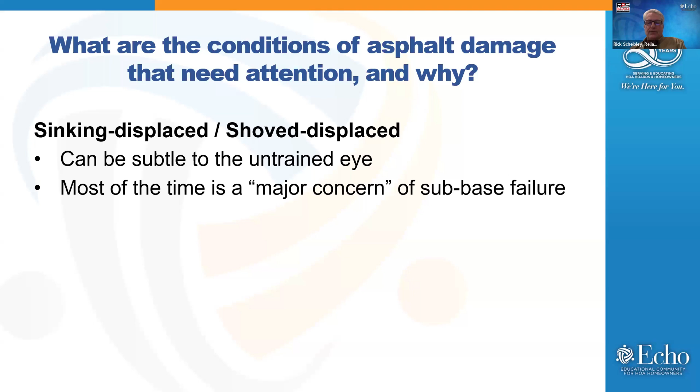This can be subtle because you could have an area 4-6 feet wide and sunken 1 to 1.5 inches, and to an untrained eye, you may not catch that. Secondly, most of the time, anything that's sinking or shoving displaced up or down is a major concern because it more than likely includes sub-base failure. Let's go to the next slide for pictures.

So the picture on the top left is an actual project in Northern California where our assessment noticed that the asphalt had sunken 1.5 to 2 inches below the top of the catch basin. So in the winter, 1.5 to 2 inches of puddling would occur, and that water would just sit on the surface, soak into the ground under the asphalt through the joint between the asphalt and the catch basin, and then eventually fill up high enough to go down the storm system.

So that was very subtle. Other than the immediate small trip hazard, it wasn't showing itself much on the surface, but it was sinking at the same time. So that was a sub-base problem.

On the right-hand side, it's very common. It's shoving. The 2 zeros that you see in the bottom right picture are areas where the asphalt was actually shoved higher by the depression in the middle between them. So it was a roadway that was not built for the level of traffic, the weight of traffic, the amount of traffic that was using the road. And as you can see, it's a fairly narrow road. So the travel point is exactly in the same spot for tires every day.

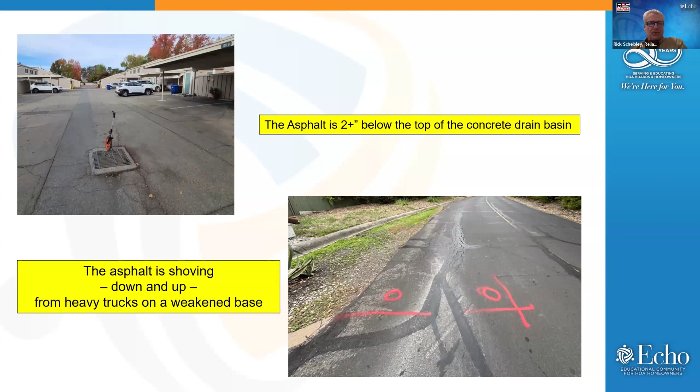So this rutting or shoving up and down is also a concern that the sub-base or the base that's under the road was not sufficiently built. It was not structurally built strong enough to hold the load of the road. So let's go to the next slide, look at another type.

Another condition is potholing. And of course, nobody wants potholes. And they are a warning to you that you have possibly waited too long to be able to efficiently maintain the pavement. And what I mean by that is the cost of fixing sub-base or base with the asphalt increases significantly what the square foot cost of your pavement maintenance project will be, unless the contractor that you hire doesn't address those things, which is very common.

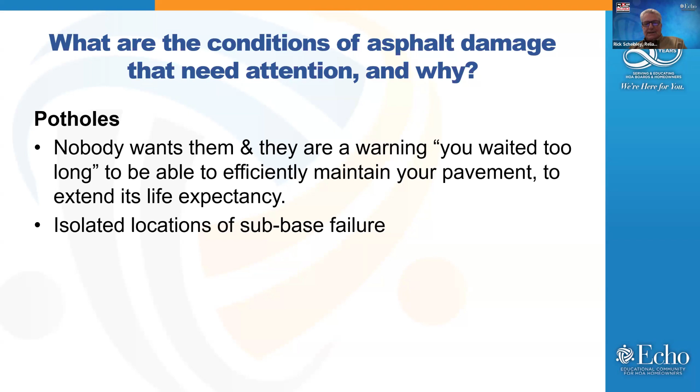But potholes, again, are an isolated location of sub-base failure. And next slide, we'll see a couple of examples. Here's an area where very obviously, very specific areas had collapsed and started sinking into the ground. What happens with asphalt is once it cracks and displaces, the rain starts increasing the amount of water that can penetrate the base. Once the base is soft with water, then it starts moving, and that allows water to penetrate the base and literally get into the subbase.

And at that point, the native soils in this road are not handling the amount of water. You can also see that this road has been neglected quite completely. So it's also a part of what's causing these potholes. Next slide, please.

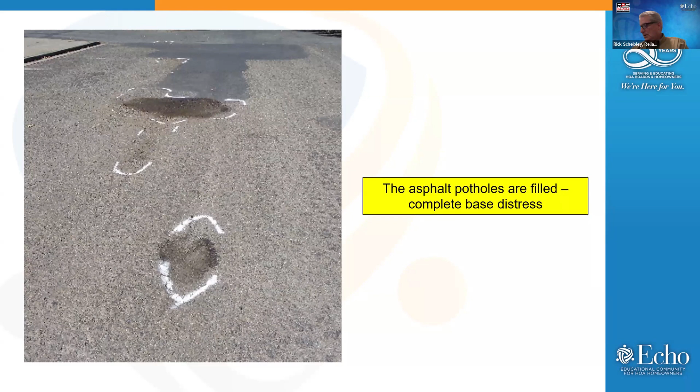Okay, maybe one of the more common conditions of asphalt that need attention is referred to as alligator cracking, and it's called alligator cracking because if you look at the pattern of the cracking in the next slide, it looks like the scales of an alligator. Something to know about alligator cracking is it's clear evidence of structural failure of the pavement, of the asphalt. It can also be caused simply by age.

Asphalt has a life expectancy. I would say it used to have a life expectancy of 40 years. I would say the high end of our current grade quality of asphalt is only 30 years, and that might be reducing. We can get to that in a little bit. But another cause of alligator cracking is the base might be soft and moving. Whoops, there's a typo there, but also the subbase could be moving.

Regardless, alligator cracking areas of failure, since they're structurally failed, should be replaced before any other pavement preservation efforts, before you seal coat, before you slurry seal, before you would even overlay your asphalt. You should not overlay over alligator damaged asphalt because the monies you're spending on the seal coat, slurry seal, or overlay paving

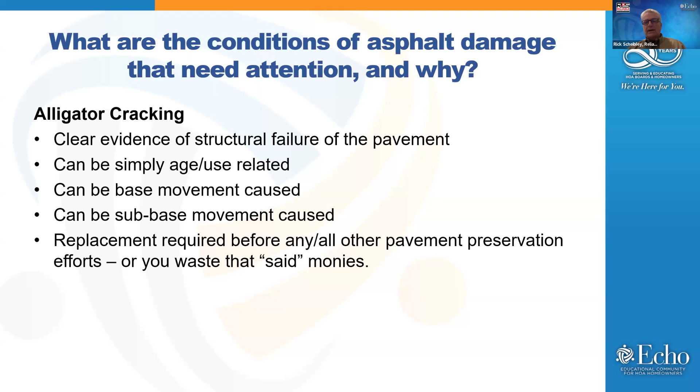So if you're going to seal coat over alligator cracking and the life expectancy of those areas is only 3 more years, that means you paid for seal coat that you're just simply going to dig up when you start doing repairs. So it's ineffective, I call it a waste of these kinds of monies on surfacing over alligator cracking. Next page so we can see the pictures.

And these are 2 conditions. These are just 2 examples, and believe me, you could almost take these same 2 pictures and put them on 2 different properties that have a different base and different subbase under them, and the life expectancy or my description right now may change based on the ground underneath, not what you see on the surface. So don't let the surface deceive you.

The area on the left is alligator cracking, but if I pulled a string line from the right side of that picture to the left side of the picture down on the ground, you would see that the area in the middle is rutting and that there is a 1 to 1.5 inch depression. The area on the right actually looks bigger, more complicated, more cracking going on, but it is more stable than the picture on the left.

So the picture on the right, you'll notice it actually was seal coated. If you can see some of the details down in the bottom left corner of the picture, that area actually was seal coated with alligator cracking, but the base was found to be so stable that it is running near, not perfectly, but near its life expectancy, where the area on the left certainly would not. That is going to be a pothole in one more winter, in my estimation. So those are examples of alligator cracking.

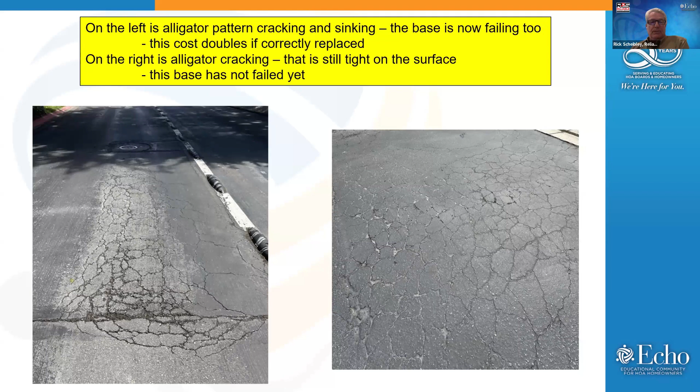Having an expert that can read those cracks and decipher between those cracks and know how to understand what base is underneath, and takes the time to check what base is underneath, is a critical component to whether or not alligator cracking should be addressed this year, next year, 3 years, 5 years, or there's many choices. Let's go to the next slide, please.

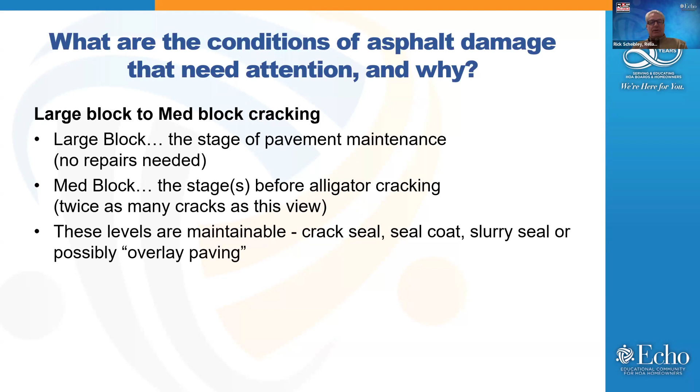Another example is, and I should have said this in the beginning, my apologies, but we're kind of going from the most severe conditions to the least severe conditions. So before alligator cracking happens that we just spoke about, you get large block cracking to medium block cracking, and that's simply referring to the size. Let's turn to the next page and I'll just discuss that.

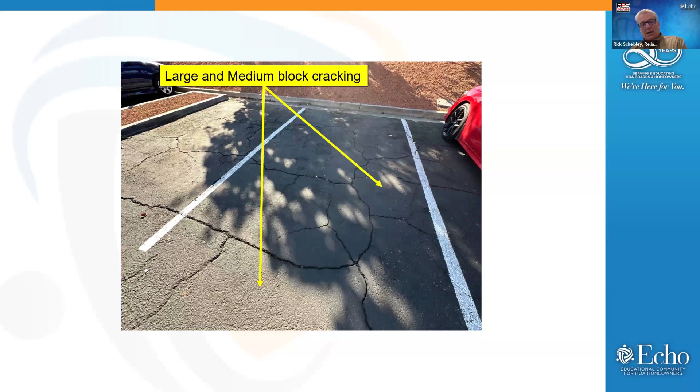Let's go to the next slide, please. Cracking. So I just showed you some cracking. It was block cracking, but I did want to mention on this page that there are all kinds of cracks. There are fatigue cracks, there are longitudinal cracks, there are horizontal cracks, there's mirror cracking, which I'll mention just for right now. Mirror cracking is when an asphalt parking lot or a road has original asphalt, and before it structurally fails, they put another layer of asphalt, not seal coat, but another layer, 1, 2, 3 inches of asphalt over

the existing asphalt. But the cracks from the bottom layer mirror through the top layer, unless you do something about that and slow that process down. Those mirror cracks can happen in less than 5 years. So there's a lot of details, a lot of concerns around cracks, and understanding what type of crack causes mirror cracking is really important. There are also paving joint cracks, grade break cracks, and simply cracking from settling. And there are even more, but not to go through too many of them.

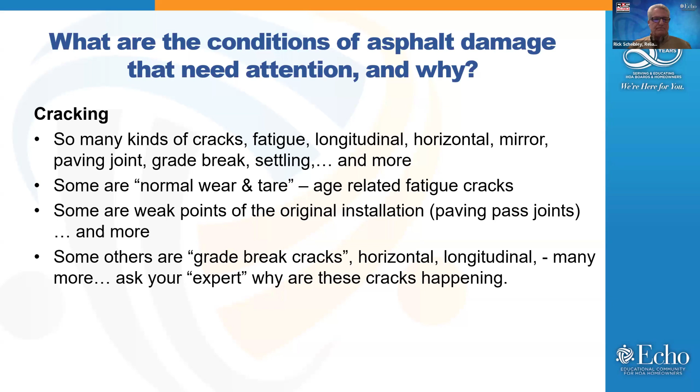So I have this picture in here because I want to kind of now move away from conditions of asphalt paving, although this is another one. But I want to talk about what's happening here, why. It's the why behind some damage. Cracks are inevitable, yes, but poor workmanship, quite honestly, rip-off workmanship, should never happen. This picture is an explicit example of a workmanship ripoff.

And what I mean by this is, I was describing a few moments ago, you have the original layer of asphalt, and if you catch it at the right time and you have the right reason, there's a reason to put another layer of asphalt over the top of the existing asphalt. It's called overlay paving. It extends the life of your road, sometimes up to 20 more years, at about 40% of the cost of replacing it. So 40, 50, can be 60, but it's still going to extend your life up to 20 more years.

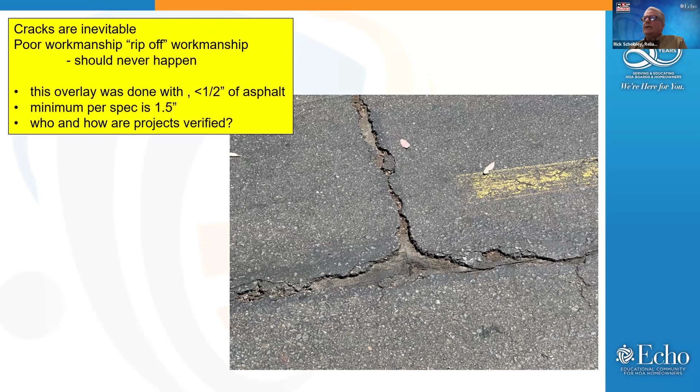This overlay, however, as you can see, was done with less than 1/2 inch of asphalt over the top of the bottom layer. You can physically see it there. The minimum specification for an overlay is 1.5 inches, and this project was done literally with less than 1/2 inch. So whoever did this overlay on this project underpaved, saved all kinds of asphalt, and did not install it at the minimum specification for doing an overlay. So who's verifying projects, and how are your projects being verified? I want to raise that point and go to the next slide, please.

Number one is, I want to kind of shift gears here now and talk about the need for a professional. I did start this company 12 years ago specifically because I was kind of running into a common thread, and that is that picture that we saw before was probably happening on about 40 to 50% of the projects that I would go evaluate. And I realized that the industry was lacking accountability, especially on private paving work. Now, if you go to the city street and the work that happens out there, they have natural inspections built in.

But on private paving, that's not the case. So here's my statement. The number one cause of short life expectancy is all connected to the quality and the level of the disclosures in your written scope of work. So my suggestion is, you do need an independent person to help you write a specification that the contractors will have to bid to.

And it's changing the way the industry works. Right now, it's common to go to the contractors and ask them, what should they do? What would they suggest you do? But I think it would be better if we did it the other way around. And I'm trying to prove that it's better that way, because you have a single scope, a single specification, and you simply need contractors who are willing and able to bid to somebody's written scope on your behalf.

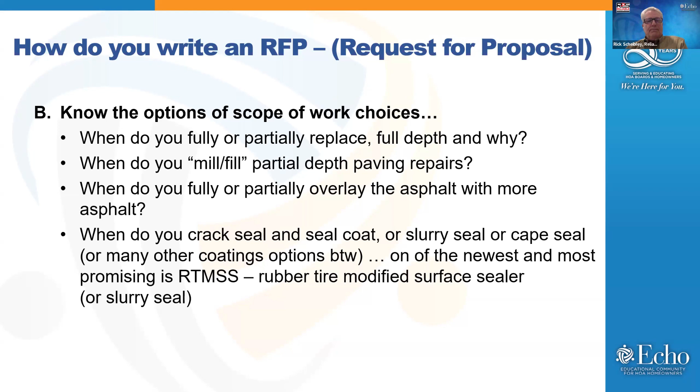Another question is, when do you crack seal or seal coat or slurry seal or cape seal? There's many other coatings these days, and even rubber tire modified surface sealer is becoming a really popular one. I was talking earlier to Connor about that, and that rubber modified surface sealer is maybe lasting 2 or 3 times as long as the seal coat, but the cost is a lot more. So there's questions about which options. Let's go to the next slide.

Typically, when you write a request for proposal, most boards of directors are asking their community manager to go get 3 qualified bids. The problem that I see with the current bid system is if you go get 3 bids and you don't have an expert helping you tell the contractors what to bid, then you rely on the contractors telling you, and every contractor has a different opinion.

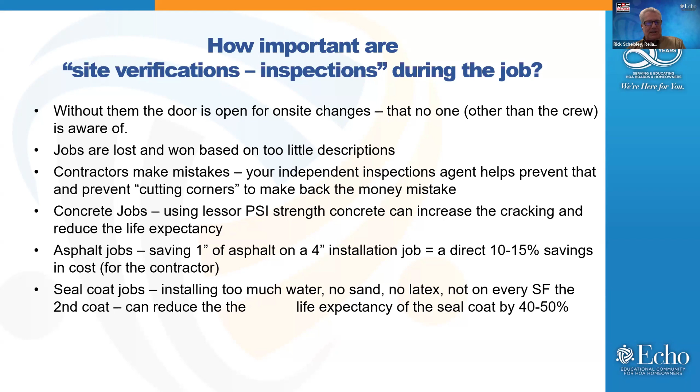We've got only about 5 minutes left. So let's go to the next slide.

When does a pavement project require a construction management company, and why? I have dipped into this just a little bit. I believe large jobs are obvious. That's the most common call we get, is on large jobs, because the cost is high. Everybody, if they stop and think about it, realizes that ultimately, once you hire a contractor, there is no inspection, there is no verification, there is no third-party member. So there's really no one looking out for you in real time. And so large jobs, I think everybody understands that.

Small jobs, however, are a different story. It's like, oh, it's only seal coat. Well, I've already gone through a little bit about that. You're talking about a 40 to 50% life expectancy difference simply by making sure that there's a bid spec set and that the crew is following it.

Believe me, it's very, very difficult, even within a construction management setting, to get a contractor to change the way they always do it. Because I've had to fight for 3 to 5 years to get some contractors to not have to call the office, tell them they're not hitting the spec, get the crew to go back out, stay out and put down another coat, because they haven't met the specification. It's a very difficult process, but it can be done.

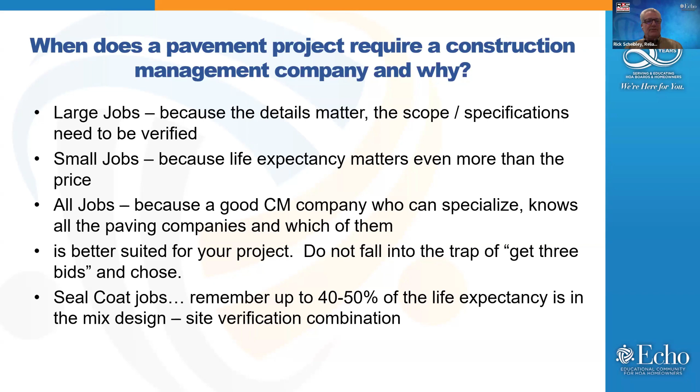Okay, so that ends the details. Let me just use a couple more minutes, and then I'm sure Dave will be ready to help us field some questions here soon.

The bottom line is, what I've seen in the industry is that accountability and competency and integrity really, really matter. And what I'm hoping to do in the industry and in your presentation today is to help you understand that having an agent who knows paving on your project, before the project, designing and bidding it, during the bidding process, reviewing those bids with you, during the project, actually being in charge of the project, checking the specifications and sending updates to you every day, exactly what's happening by picture evidence. Those things are far more important today than they've ever been.

One of the main reasons why is, I'll give you this example from 1979 when I walked onto a paving crew for the very first time. I was the only new guy on the 10-man paving crew. Today, if you go to just about every paving company and ask that crew, how long have you been paving? You would find out of 10, 3 to 5 have good experience. The rest of the crew are being told what to do. They are new. They're trying it out this season. The depth of experience per man, per crew, has significantly reduced in the last 30 years. Therefore, the need for inspections and verifications has risen at the same pace.